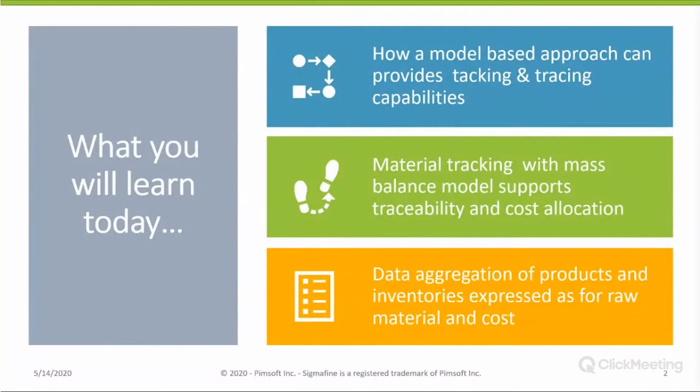I take the opportunity to introduce PIMSoft, our company, to you. Our mission is this: we are in the business of generating value for our customers by ensuring the accuracy, reliability, and usability of their process and manufacturing data at all times and across the enterprise. Essentially, we are here to add value. We are using your data, we are improving it, we are conditioning it, we're putting it in context with the aim of bringing improvements to the users, whether they're systems or persons.

Now, today you've heard PIMSoft, that's the company. We've been around for a while. We've been here since 1993. Sigmafine started in 1993 with KBC, while PIMSoft started in 1995 as a distributor of the OSI products, and through the years acquired Sigmafine products from OSIsoft.

Sigmafine is our flagship product, and today we're going to show you the material tracking arm of this product. But let me just let you know that PIMSoft has a presence here in Italy, in the USA, and in India. That's our newest office. The company continues to grow, and not just in having new locations, but we've recently acquired Omicron, which has expertise in the OSI product customization.

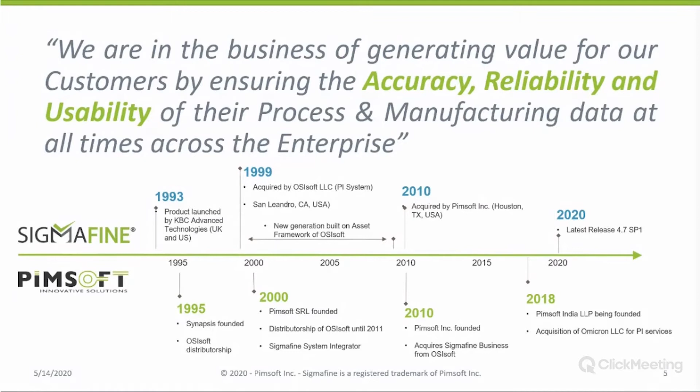So let's talk to you today about PIMSoft in context to fertilizer. Why do we think this software can bring value to fertilizer? Because in fertilizer, we know that there are some issues, pain points in the next slide. We know you produce based on what people want. We know that your products are cyclic. You make products at different times of year. It varies depending on the country. So that's quite difficult to even do.

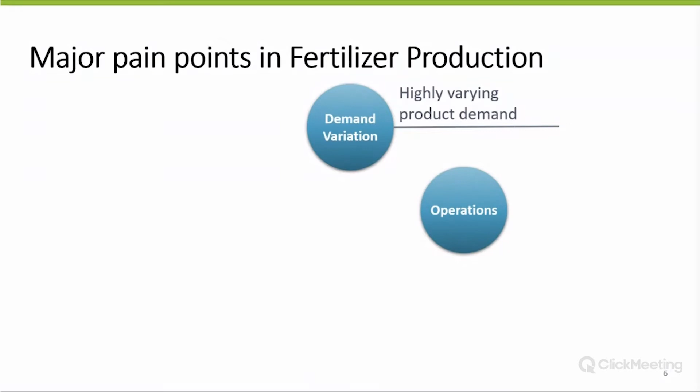Inside your production area, the operations area, we know that the data sometimes is limited. It can be unreliable, sometimes it has poor quality, sometimes it's just missing. And in fertilizer, everybody uses it as a commodity. You can use many raw materials, choosing them based on availability, based on cost, based on processability. So you've got three things happening that you need to do well every day in every batch, which can be a tall order.

And beyond this, we know that, let's say, at least in Europe, sometimes you are required to state on your product where the material came from. They not just need to say how much NPK there is, but you need to know where this NPK came from. And this is material traceability, taking your raw materials to your product. And if you even have a solution for each of these pillars, somebody wants to see the report connecting all of them, putting them into context. So you can imagine this is quite complex, as you must be facing today.

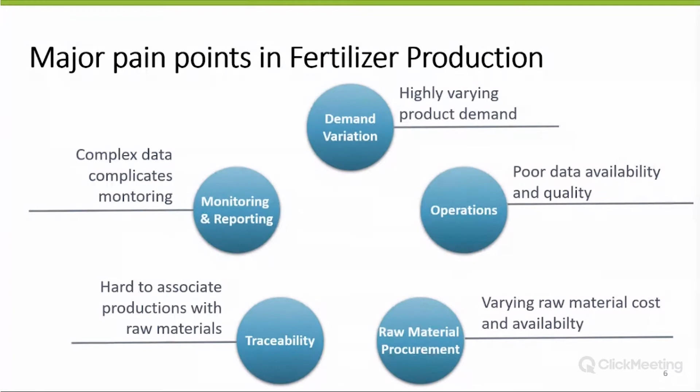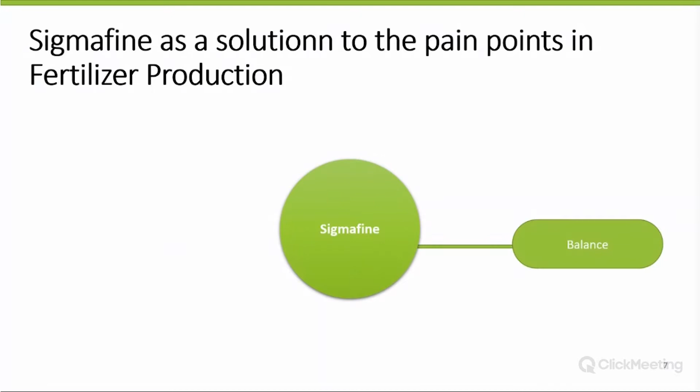And these 5 points, we think that Sigmafine is a solution that can address each of these 5 pillars. Why do we say that? Sigmafine has the balancing algorithm, and the balancing algorithm is where Sigmafine can connect to your operations data, to your planning data, to your ERP data, so that everything is consistent and coherent, on a batch basis, daily basis, monthly basis, eliminating massive material write-off at the end of the month.

And traceability, we're talking about material traceability. Sigmafine has another arm of conditioning your data, and this is the tracking arm. Tracking is where today you will see, in context, how you can allocate and follow your raw materials to your products. That addresses your traceability need. And you obviously have this reporting.

How do you tell everybody you're doing a good job, or how do you spot when you're doing something bad?

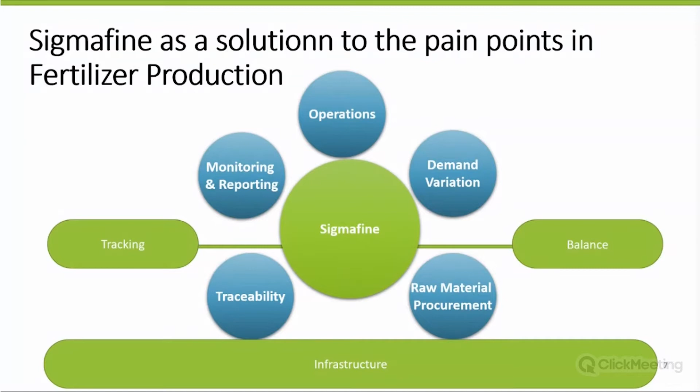Sigmafine is not an Excel tool. It is an infrastructure. It is scalable. It can address industries that have 200 assets to industries that have 20,000 assets. We have connectors to ERPs, to files, you name it, we can connect. So Sigmafine, we think that Sigmafine as an infrastructure with the balancing algorithm and the tracking algorithm can be one

of your key pillars to using your data effectively. Today, Elena is going to talk to you about NPK.

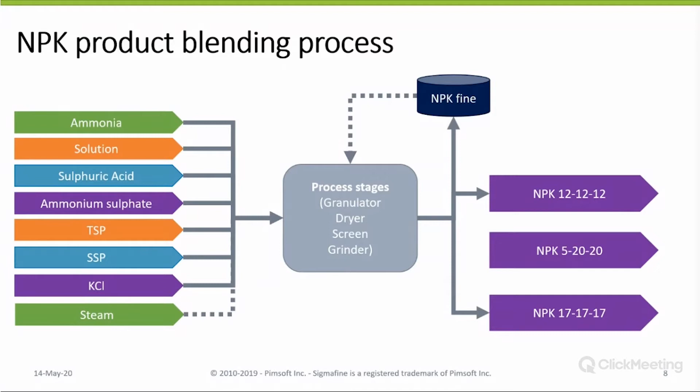Okay, we're going to be looking at 3 grades of material or processes, very simple. It's a black box approach. The black box considers the granulator, dryer, screening, etc. And you have a common recycle, we call it the NPK fines. And you have multiple material sources that you are switching and changing to meet your grade based on availability and stocks. So Elena is going to run through this process and show you how you do it.

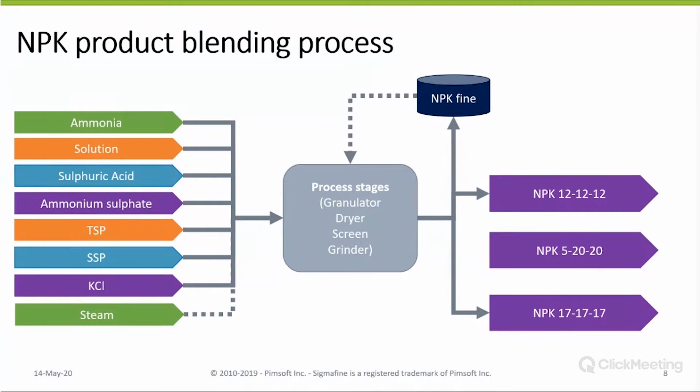And in the end, you will come back to me and we'll have a quick look at some reports. Back to you, Elena. Thank you, Velisha.

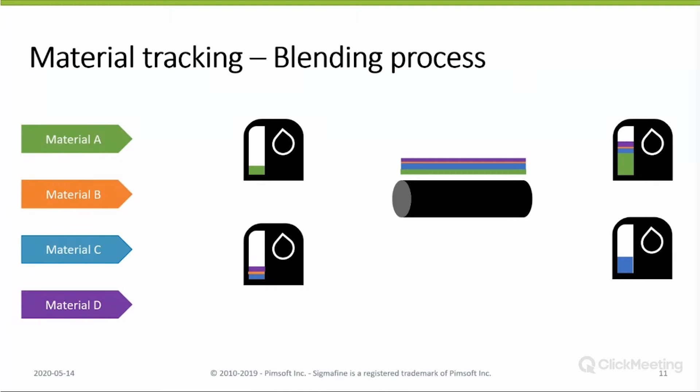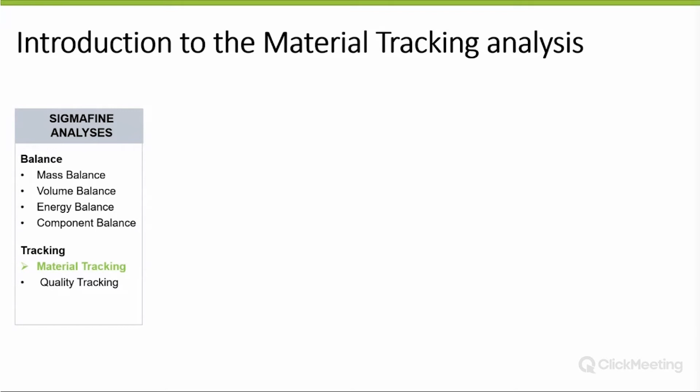Sigmafine is a system that provides many analysis plugins. We have the balance plugin and the tracking plugins. Today, we want to focus on the material tracking analysis. And the way it works is very simple. The analysis uses a composition tracking solver that reads all the input quantities in mass or volume and the input materials, and then calculates a reconciled material composition for the flows and the inventories which you are interested in.

These results can be used for different scopes. First of all, to keep tracking of the material mixing quantities through your model. Then you can use this information to allocate the cost per product, or to track the material loans in an ownership context, or also to monitor the material packets through your model to avoid contamination or out of specification products.

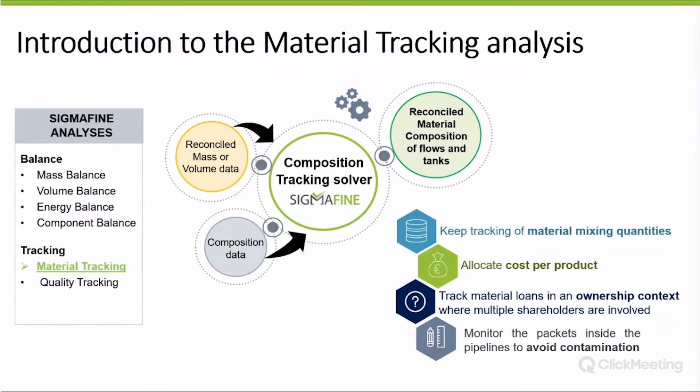So let me briefly show you how this analysis works. The tracking algorithm considers many information. The first step is to execute the balance. The use of reconciled data yields more effective computation results.

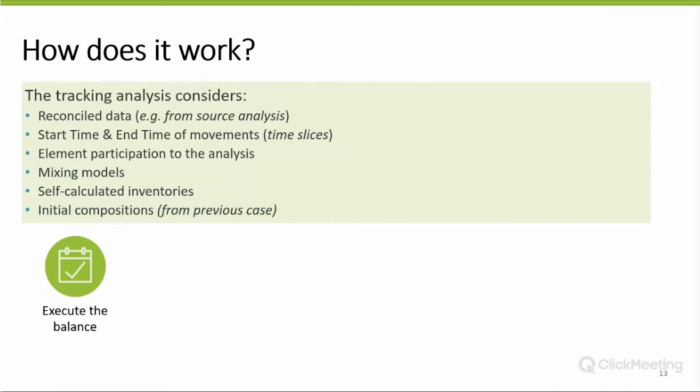And as the composition tracking analysis is fully integrated with the Sigmafine architecture, you can decide, you have the possibility to read this reconciled data from another source analysis, the balance analysis. Alternatively, it's the composition tracking analysis itself that can execute the balance for you.

The second step is to collect all the movements that happen in the observed period, each movement with its own start time and end time. And this is important because the analysis periodicity may be daily, for example, if we focus on 1 day period, but the tracking algorithm behind considers all the time slices that happen during the day.

Then you decide which elements are part of the calculation. This permits to use, for example, the same Sigmafine model that we use for the balance, with no need to build a new dedicated model just for the tracking analysis. So you can reuse what you already have built for the balance.

And in order to calculate the composition of the tank, of the flows and the movements, the algorithm considers the way how the materials are mixed in each inventory, in each point. And this is defined with the mixing models.

In case you have inventories that are not directly measured, because sometimes this information is not available, Sigmafine is capable of calculating the inventory based on the surrounding measurements, if the model has enough redundancy. Then the tracking analysis based on these results can calculate the material composition for you. Finally, the algorithm considers the history of consequent phases, so the initial composition of the current day is automatically taken from the previous day.

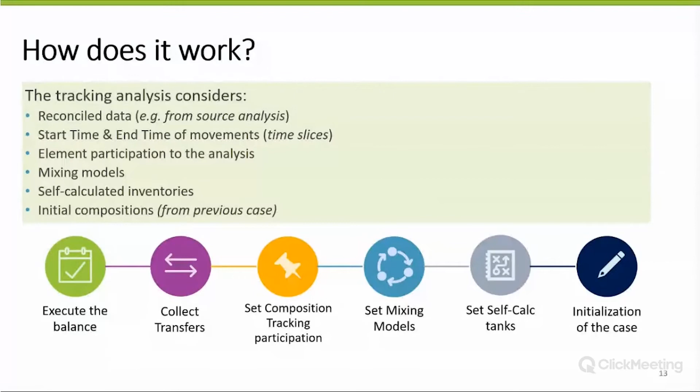We previously said that the way materials are mixed in the model is defined with mixing models. Here we show you the ideal mixing method used by the analysis.

The well-mixed method is used for tanks with homogeneous material. The input materials that enter are mixed together with the initial inventory, if there is some inventory, and the well-mixed material is then sent out. The baffled method is similar to the well-mixed, but it keeps the input and the output separate, so it is suggested for tanks with an internal baffle.

The makeup purge makes the input go directly to the output line, and only the excess is taken from the bulk of the well-mixed tank. If there isn't enough input to supply the required output, then the remaining quantity is supplied by the tank itself. And vice versa, any excess input material is purged to the well-mixed tank.

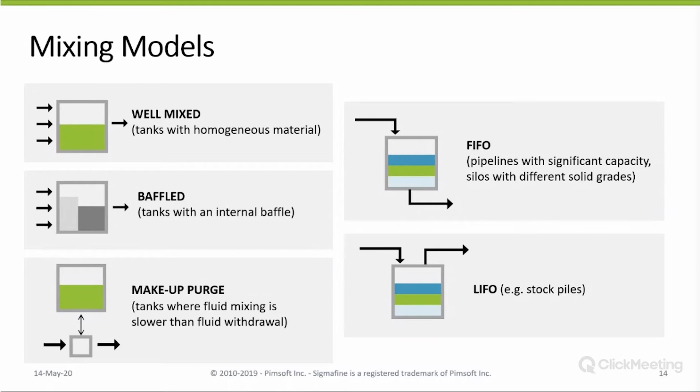With the first in, first out method, each packet of material comes out in the same order as it went in. No mixing of material, so every packet is kept with its own sequence. And with the last in, first out, each packet of material is removed in the opposite order from when it came into the inventory.

There are some optional parameters that you can specify for the analysis calculation. For example, the analysis gives you the possibility to eliminate components from the results when their quantity becomes not significant for you. For example, 0.0001% may not be relevant for you to count, so you can decide to eliminate it, and this elimination is done respecting the conservation of mass.

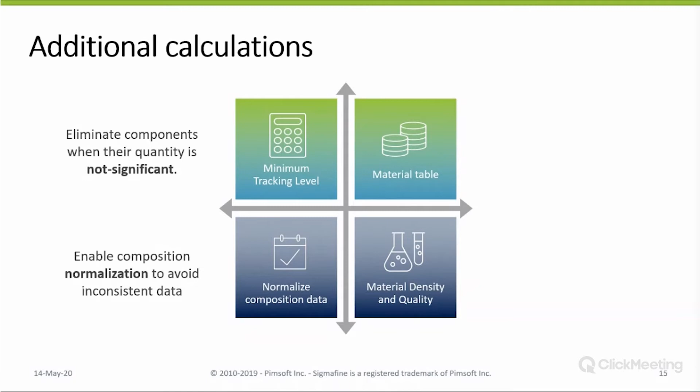Then you can normalize the composition data with the reconciled data, and this is strongly recommended to avoid inconsistency. You can choose to exclude some materials from the analysis, and especially in this case it's recommended to choose the normalization option. And you can even decide to make the analysis calculate the final density and other material quality or material property based on the composition results.

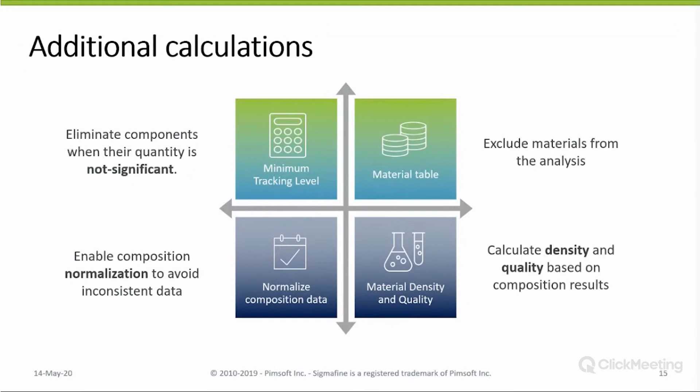We prepared a demo for you to show a material tracking application for the fertilizer industry. We modeled an NPK product blending process for different final NPK formulations. The scope of the analysis is to track the daily composition of NPK product and NPK fine pile based on the raw materials which NPK is composed by. Based on these composition results, the analysis also calculates the cost of the final NPK products and inventory. This permits us to see how the material quantity may impact the final NPK cost.

So we propose a 12-12-12 formulation, then a 5-20-20 formulation, where, for example, the ammonium sulfate is not used. And finally, a 17-17-17 formulation, where some fine is recycled back to the process.

So let me move to a machine where the Sigmafine material tracking is installed, and let me show you the model that we prepared in Sigmafine. So we have on the left side all the possible input materials that can be used to produce the NPK.

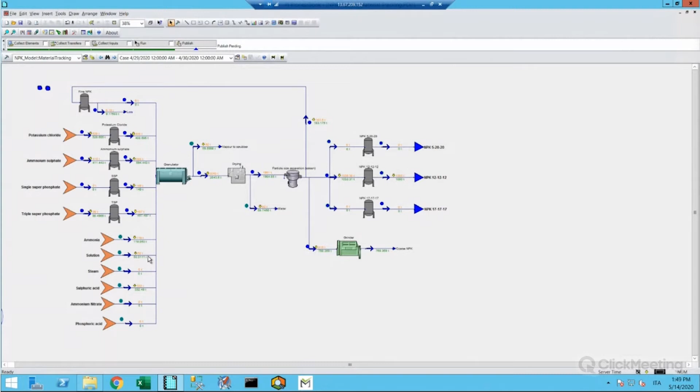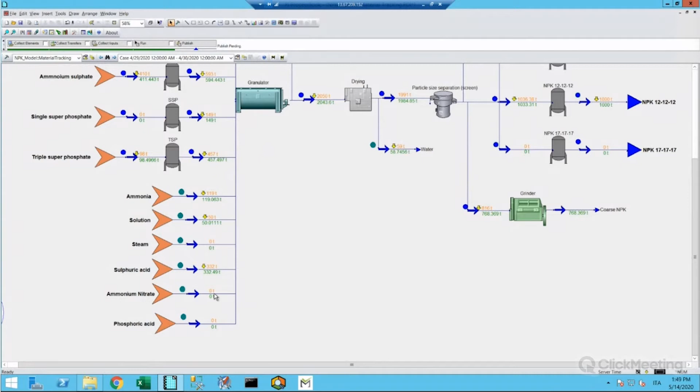Depending on which formulation we want to produce, we may have some active flows or not. For example, for this case that I'm looking at, the 29th of April, we are not using the ammonium nitrate. It is represented here for other days where we are using it, but in this case we have the quantity equal to 0.

Then the raw materials are processed. We have different stages: the granulator stage, where some vapor is sent out to the scrubber, then the NPK is dried in the drying process, so again we have some water that goes out from the model. And finally, the NPK is produced and sent to the particle size separation, to the screen process.

From here, we can produce different materials, different formulations of NPK. The case we are looking at, the 29th of April, we are producing only 12-12-12, so I see that the other two products have 0 quantity.

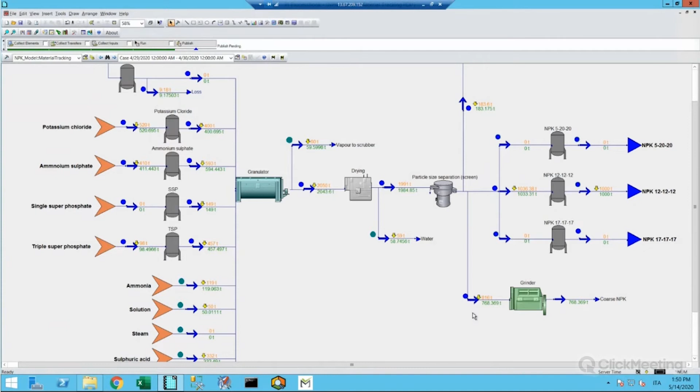Then there is some coarse material that is sent out from the model, and again some fine NPK that is sent back to a silo. You have the possibility to recycle this NPK into the process, but for the case we are looking at, there is no recycle, the quantity is 0.

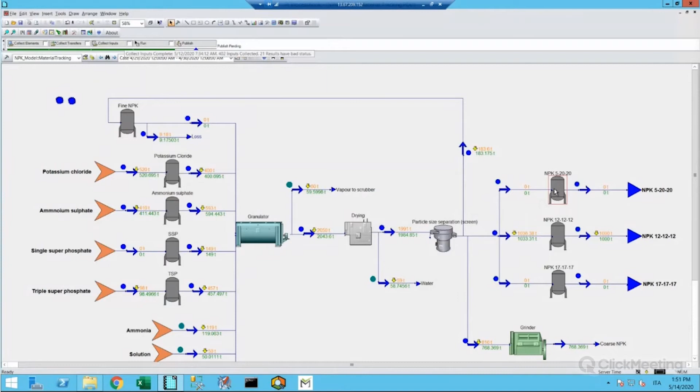Regarding the 3 silos that we have here for the product, they are not directly measured, so the inventory of the tank, the final inventory, is automatically calculated by Sigmafine according to the initial inventory and the inputs and outputs. Let's take, for example, the silo for NPK 12-12-12. Let me zoom in a bit.

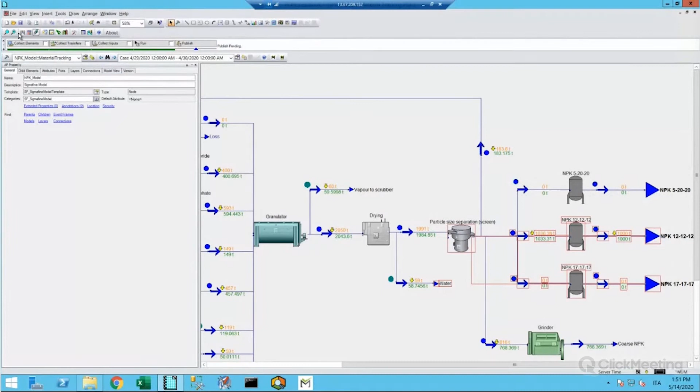And let's check some results. Here I can see all the Sigmafine results in a tabular view. And I see that the tank has no measurement for this because the user doesn't have this information available. There is an opening mass of 1,000 tons, and Sigmafine calculates for you the output based on what enters and what goes out.

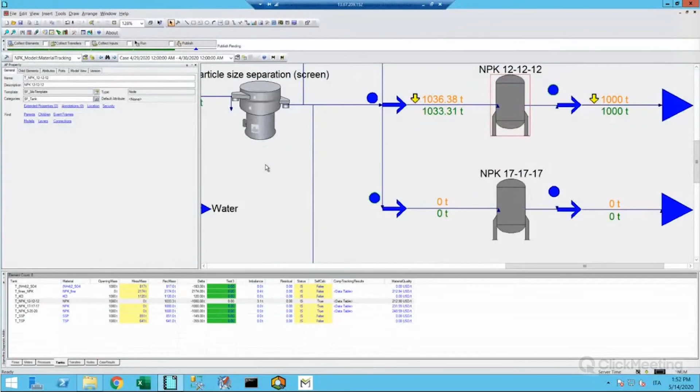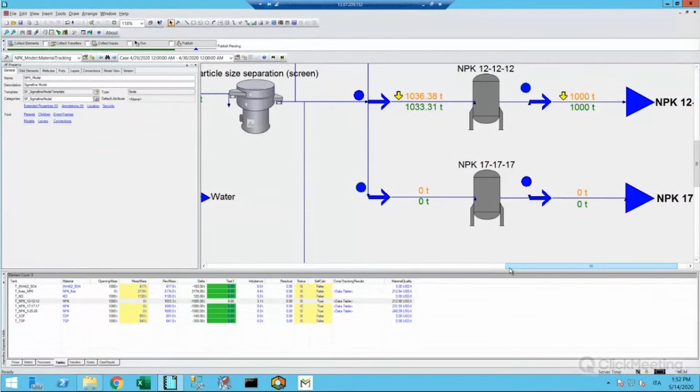So we said that the first step is to execute the balance of the model to be sure that no material imbalances will badly affect the composition results. This is the reason why we have some difference between what was measured by your meters, by your measurements, and what is the reconciled data in green.

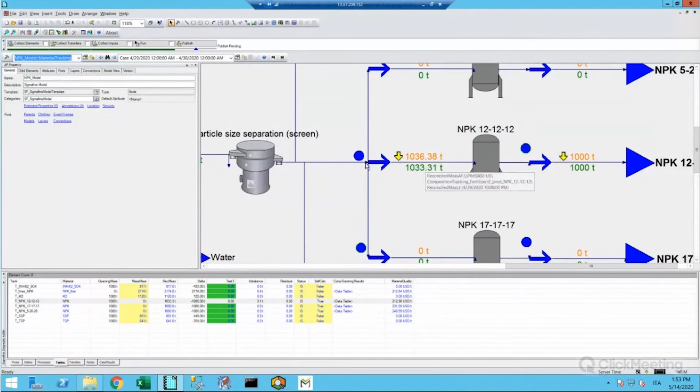The data for this demo were taken from the balance analysis. So we are looking at a model where two Sigmafine analyses are executed. And then the reconciled data is read as input into the material tracking analysis. So let me show you some of the results that we prepared for this demo.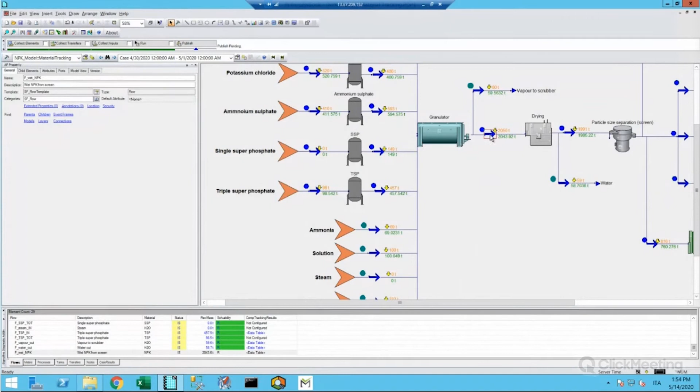If I move to the second case, the next day, I see that again, we are producing the 12-12-12 product, but the formulation of raw material, the quantity has changed because we are using less ammonia. Before it was 100, now is 70 tons, and more solution, 100 tons. So if I look at the final composition here, this composition is given and calculated automatically by Sigmafine.

And in addition to this, since I'm using less ammonia and more solution, I see that the material tracking is calculating also the cost, because I want the analysis to calculate the final cost of the product. And here is 212 USD per ton.

For the 3 consequent cases, the 1st of May, for example, we are changing the production. We are producing now the 5-20-20 formulation. You see that the 12-12-12 is now equal to 0. And again, I can compare the cost and the composition of this product.

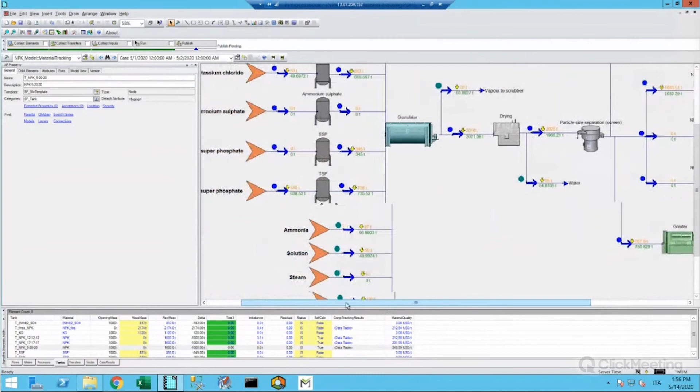You see here, there is no ammonium sulfate in the raw materials. This means that the formulation, the composition for the 5-20-20 is not containing the ammonium sulfate. And if we want to check, I see that the ammonium sulfate that was used here is 0. So this is reflected in the final composition of the product.

Finally, I move back to the last case where we are producing another formulation, the 17-17-17. And this is produced using some fine recycle. So after the screen process, some fine is recycled back and sent into a silo. And from this silo, there is a recycle of 3,000 tons that is processed again to produce the 17-17-17.

In this case, if I check the material composition of the NPK produced, I see that there is, again, ammonium sulfate. In this case, the ammonium sulfate that is contained here in the NPK formulation is not coming from the raw material itself, because I see that the quantity is 0, but is coming from the recycle because it was containing originally some ammonium sulfate.

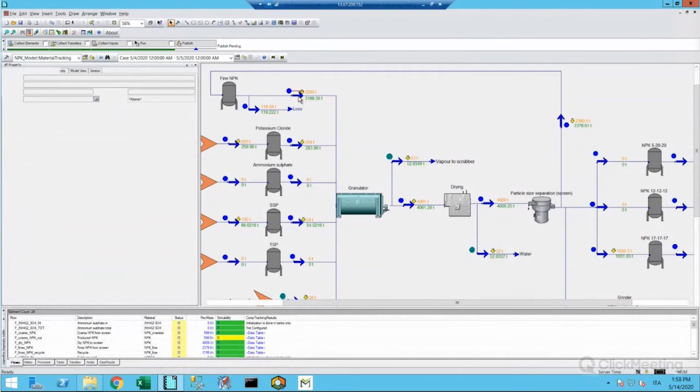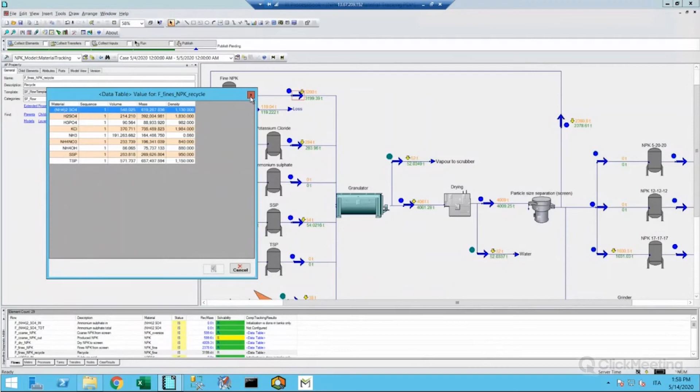So if I check this information, I select the recycle flow, and I see, let me refresh the data, that here there is some ammonium sulfate. This means that the recycle has material NPK fine, but the analysis is capable to track the raw material composition till the end of the product.

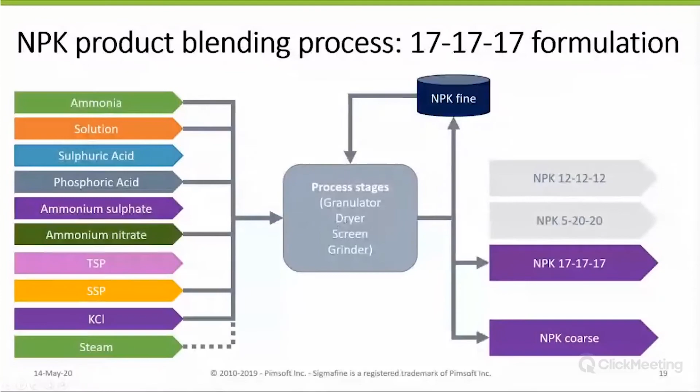So Elena showed you, let's say, the buttons in Sigmafine and a brief introduction on how Sigmafine is able to track your materials as they pass through your process. That's probably nice for the engineers in the room, but perhaps you're a manager, or you're in planning, you are from operations, and you need numbers. So let's look at some reports.

We only had 5 cases, but let's say we know it's a week. We're running the plant. These are Monday to Friday results, let's say. And the plan was to make 12-12-12, 5-20-20, and 17-17-17. So this is the goal. And let's see what the results look like.

So on the first 2 days, we made the material as per the recipe. And as Elena showed you in the demo, the operations decided to tweak the recipe a little bit, maybe because they had a buildup of inventory on some recycled solution, but the grade was made, let's say. So that's a good job.

Then we move on to making some 5-20-20. And here we see that the recipe was maintained, no changes were made. There are small changes between the recipe and the balance numbers. Elena mentioned that Sigmafine does do a mass balance reconciliation to ensure that the data is good quality. So everything is according to plan. You can see it in a click of a button.

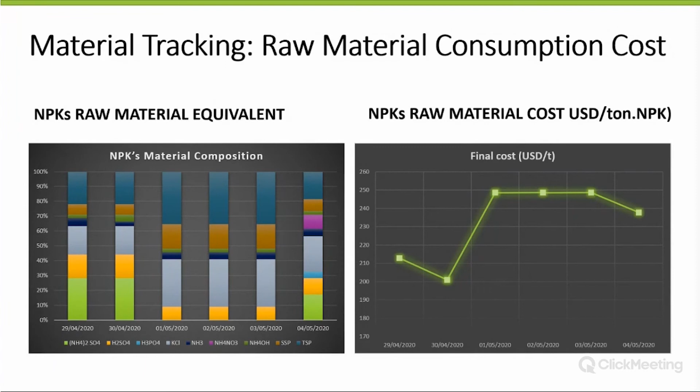So in a nutshell, somebody can see 5 days of work in 2 graphs. This is on your product side. If you look on your inventory side, not everything you use goes out in the first pass. We know you have a recycle. Your recycle load can vary, around 1 to 1. When you were making the NPK 12-12-12 and 5-20-20, we're in the 1-to-1 ratio.

We are accumulating a fines product, let's say an intermediate. And in the 17-17-17, this recipe calls to reuse some of these fines. So you can see here that you're finally reducing your inventory. So you're turning some of your fines into product.

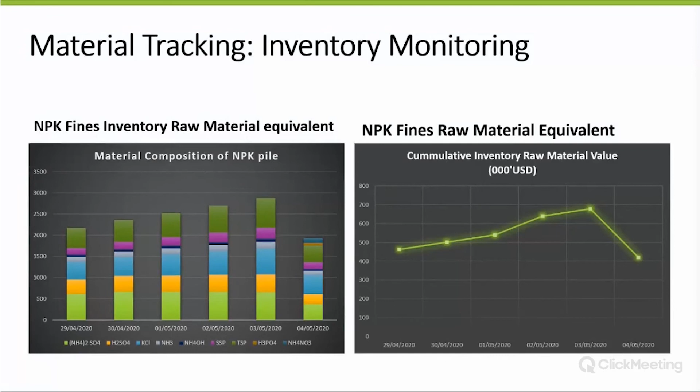And when you do your daily accounting, you always need to talk about your costs. So you can see that your raw material value was increasing in time when you were making the recipes that did not call for a recycle flow. And so you are moving from $500,000 to $700,000 of stored value. So this is not a number you can neglect on your balance sheet. So here we show you very quickly that the material tracking along with the mass balance is able to follow your process, to account the cost in your product as well as in your inventory.

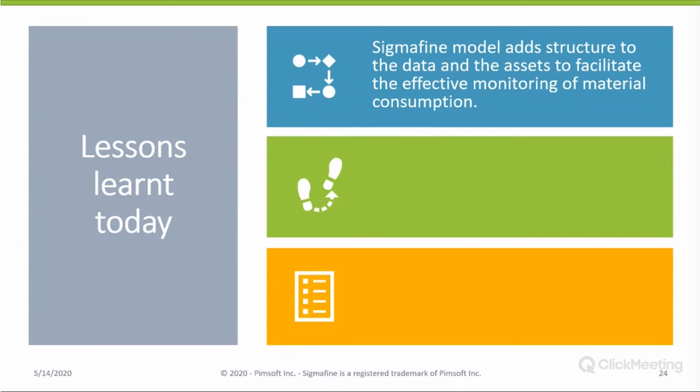But let's focus on what we learned. It's not magic. What we need is a balance. We need a model. We need a structure. When you give us a structure, when we talk with you and we get a structure, and we apply our algorithm, which is the tracking algorithm, we are able to allocate costs, allocate material on your raw materials, on your products, and on your inventories.

And we showed very briefly that this data doesn't have to stay in the hands of the engineers or the production accountant. It can go to dashboarding. It can be made very presentable and consumable by managers, planners, the purchasing department, etc.

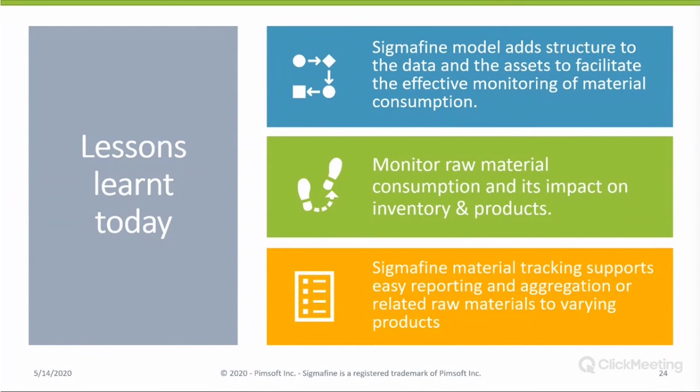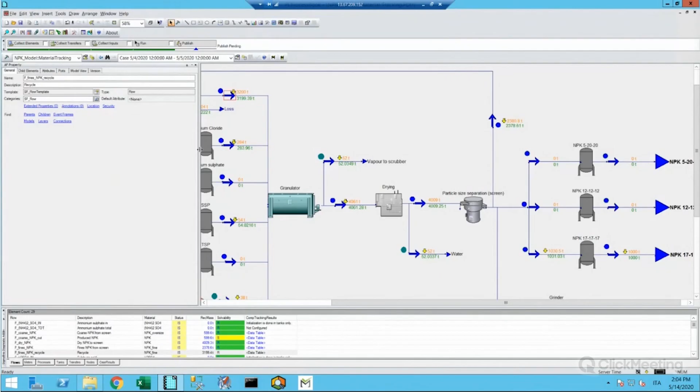First question is, how and who selects the mixing model? So this is a configuration. I can show you briefly. So each of these symbols represents an asset that is stored in a database, and you can configure it. So you decide per each asset which is the mixing model in a dedicated attribute.

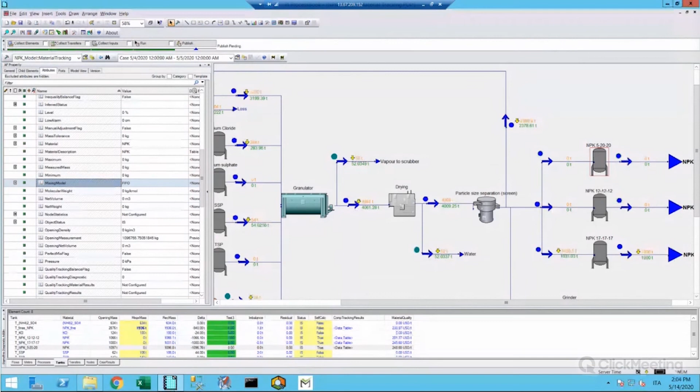So there is a mixing model attribute here, and depending on which type of tank we are looking at, you define the logic. It depends on the process, it depends on the fluid that enters, and the structure of the tank itself. Are you using dynamic data reconciliation to determine material movements?

Yes, we are using a data reconciliation algorithm to solve the material imbalances. And also, in this case, if you have material movements, the material movement quantities will be reconciled in order to satisfy the balance equation.

Can the inventory be seen in terms of products? Yes. In this case, we showed you with the demo the inventory in terms of raw materials, but it's possible for you to choose which element, which material to track. So in this case, we are saying that the fine is made of raw materials. But for example, depending on which material enters, you can decide to specify the product composition. So the percentage of 12-12-12 inside the tank, or the percentage of 5-20-20 inside the tank. So yes, it's totally configurable.

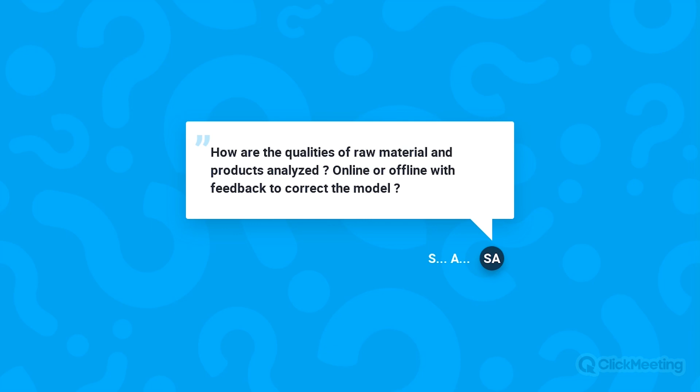In which sense did you mention digital twin in the webinar title? I take the liberty to answer this question because if we didn't talk about your digital twin, there is no way we can track your material without knowing how many inventory points you have. We need to have a copycat of your materials moving in your facility. And if we don't start with a model, with how the assets are arranged and how the materials are moving, we are not able to track anything.

And we think this is one layer in your digital twin. Your digital twin will have, of course, control loops. It will have many layers, and material tracking and mass balancing, which will be our next webinar, should be layers in your digital twin. You will also have health and safety issues and electronic logbooks. We just say that the tracking of your materials, the balancing of your mass, your energy, your volumes, and tracking your qualities should be layers that add value to your digital twin.